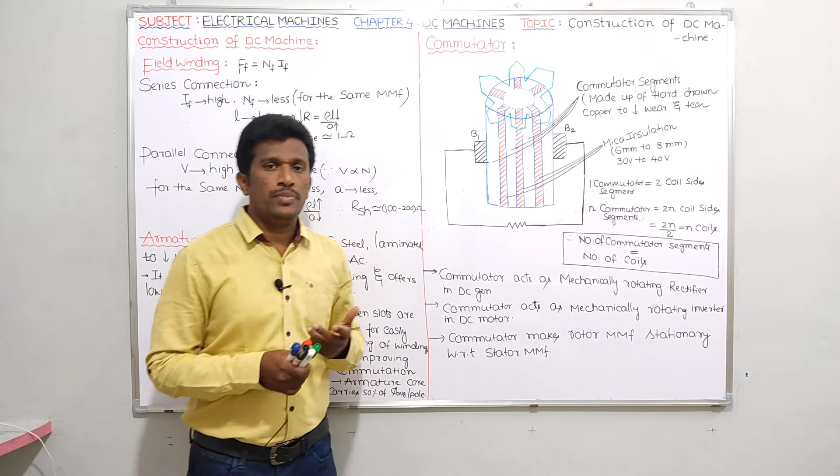Please try to recollect. I told regarding yoke - yoke provides return path for the flux, and yoke carries 50% of average value of flux per pole. Regarding yoke, there is no need to provide lamination because it carries DC flux. And pole core also - there is no need to provide lamination because pole core also carries DC supply.

Whereas pole shoe needs to be laminated to reduce eddy current losses because pole shoe is nearer to armature core. In armature core we already know we have some slots, and in those slots we place armature winding. Armature winding carries AC supply. Since pole shoe is nearer to armature core, there are chances of having eddy current losses, so to reduce eddy current losses we have to provide laminations for pole shoe.

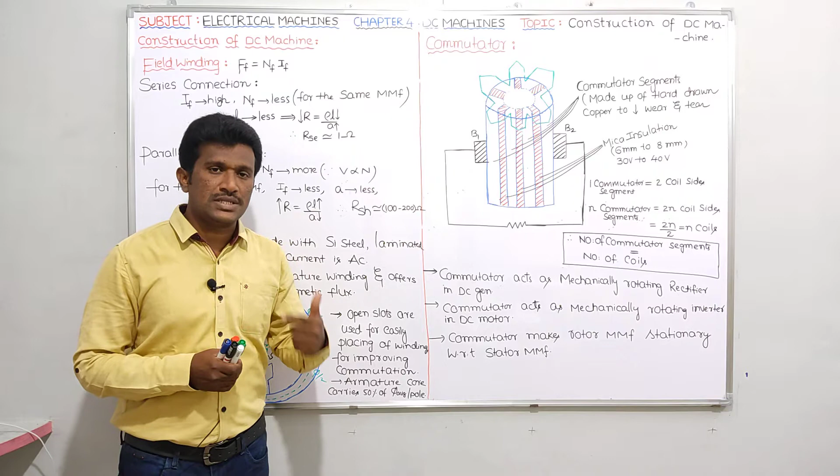And I told about pole shoe also - we always have to use non-chamfered poles, thereby the distribution of flux waveform will get a flat top and trapezoidal shape, so that average value of flux per pole increases, thereby EMF increases and torque increases. I also told pole arc by pole pitch is equal to 0.7 to 0.8, there is a value.

Okay, in this session let me proceed with field winding. If you take this field magnet, to be frank it is nothing but an electromagnet. Since it is an electromagnet, we need winding through which if we send current, then poles will be created. Suppose if I use a permanent magnet, there is no need of using field winding - flux will come automatically. Here since I'm using electromagnets, you have to place field winding on that magnet and give DC supply for the field winding, then only poles will be produced.

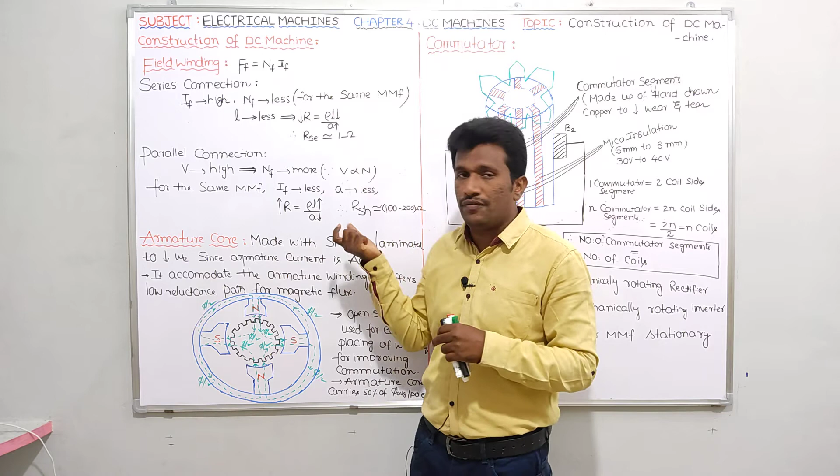So regarding this field winding, generally field winding will be having connection with the armature winding in a DC machine. What is the value of series field winding resistance, what is the value of shunt field winding resistance, what is the relation between series field winding turns and shunt field winding turns - all those things can be explained here.

It's very simple. Generally field winding means what? If you want me to write MMF for the field winding - MMF equals number of turns into current. FF is equals to NF into IF is the formula for field winding MMF.

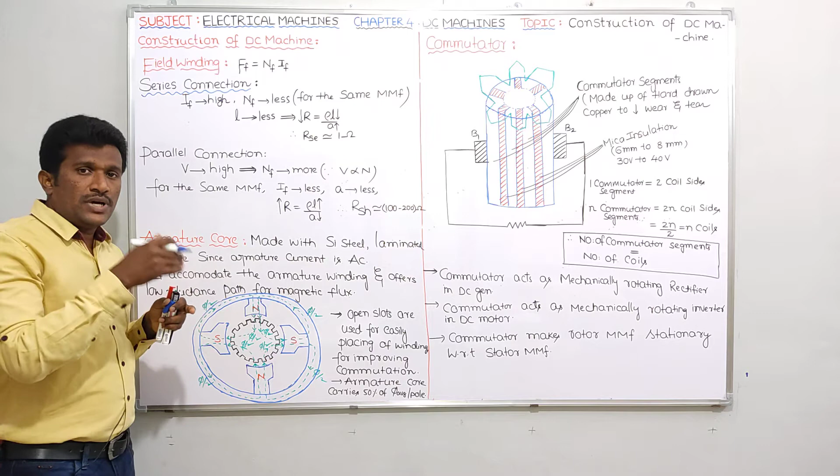Suppose if you take a series machine, you know in series machine you can take series generator or series motor. In series machine field winding will be connected in series with the armature winding. That's why we call field winding as series field winding. Since it is in series with armature winding, the current flowing is more - current is high if field winding is connected in series with the armature winding.

Whenever current is more, cross sectional area for the field winding will also be more. Whenever current increases, definitely cross section area required for the field winding also increases - everybody knows that. And here for the same MMF, if current is more, so what about number of turns? It should be less.

Whenever number of turns are less, length will be less. You know the formula R equals rho L by A. So as I told, whenever field winding is connected in series with the armature, it carries more current, so cross section area for that field winding will be more. And since length is less, resistance value will be less, around 1 ohm.

So what is the conclusion? If I use field winding in a series machine, maybe series generator or series motor, what is the resistance of that field winding? This RSE means the resistance of series field winding, that value will be very less, around 1 ohm. So RSE value is very less and number of turns also very less. That's why whenever I show series field winding, we will be showing less number of turns. This is the reason. Series field winding resistance also will be very less, around 1 ohm.

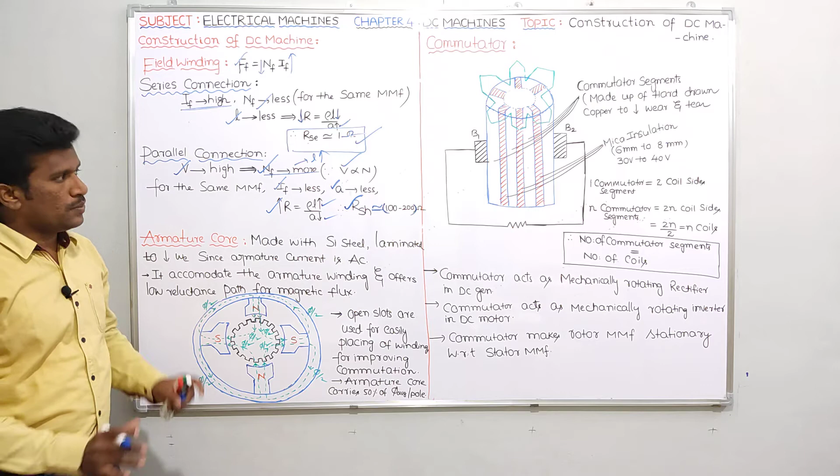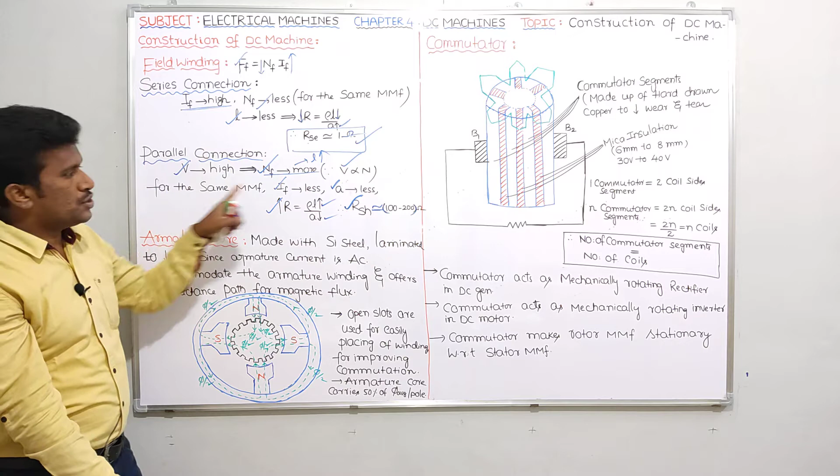Please try to relate these two things, series field winding and shunt field winding. If you observe, shunt field winding resistance value is more than series field winding resistance. Let me write here: RSH value is more than RSE. This is one conclusion. Next, let me compare number of turns. For series field winding, number of turns are less. For shunt field winding, number of turns are more. So number of turns for shunt field winding is more than number of turns for series field winding.

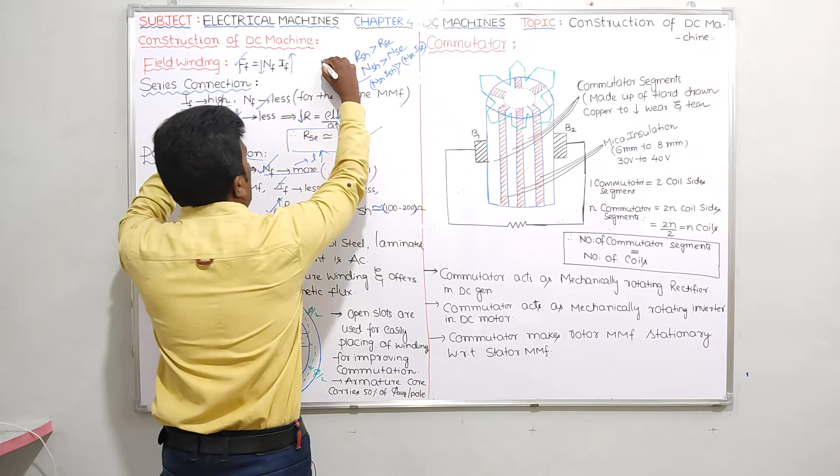Let me compare NSH, ISH and NSE, ISE. That means if you want to compare MMFs of shunt field winding and series field winding, shunt field winding MMF will be more than series field winding MMF. Before that, let me compare shunt current and series current. Shunt current is less, series field winding current is more. That means ISH is less than ISE.

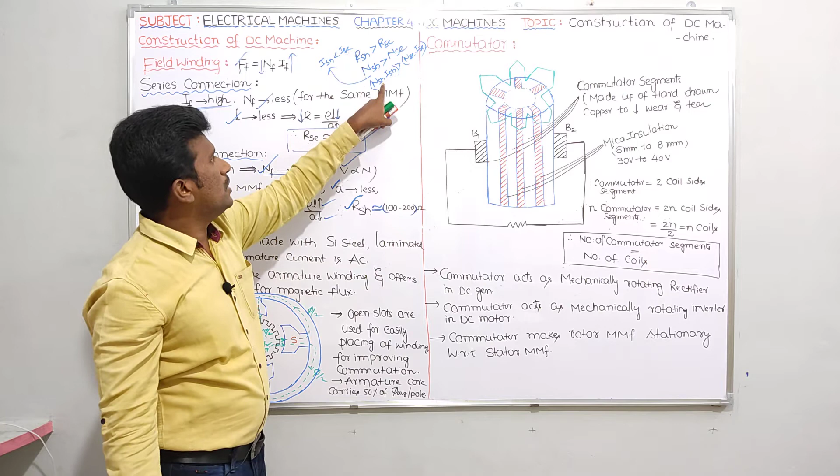You may get a doubt here: since ISH is less than ISE, you may think NSH times ISH should be less than NSC times ISC. Not correct. Because MMF depends on current and number of turns, but mainly it depends on number of turns. Since NSH is more than NSC, though ISH is less than ISE, since NSH is more than NSC, therefore NSH ISH is more than NSC ISC.

So please try to remember these relations. If you compare shunt field winding and series field winding: shunt field winding resistance is more than series field winding resistance, shunt field number of turns are more than series field number of turns, shunt field current is less than series field current, and shunt field winding MMF is more than series field winding MMF. Please try to remember these things, it will be useful for us in future.

Okay, next, this is about field winding. Now let me discuss about armature core, guys. Armature core, it's very simple.

Just like the pole core provides accommodation for field winding, the armature core provides accommodation for armature winding. In the armature core you have to provide slots to place the armature winding. This means the armature core accommodates the armature winding, and it offers low reluctance for the magnetic flux. That is very important.

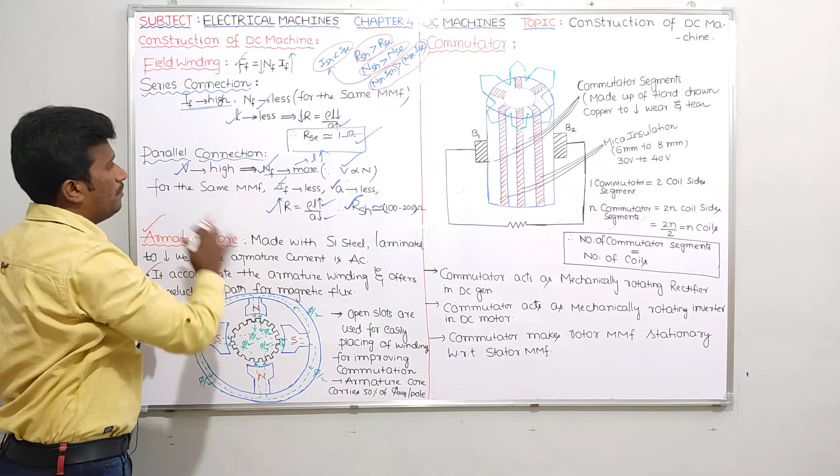See guys, this diagram I already drew in the previous video, so I just drew a very big diagram here. I think I erased it, but it will be there in your notes. There's no need to draw it once again, but if you want, you can draw it.

See guys, whatever flux is coming from under one pole, here I already took it as, suppose, flux per pole - the average value of flux per pole - I had taken as phi. Suppose under the north pole it is phi.

This phi is dividing like this: flux lines always start from the north pole surface and reach the south pole surface, taking a path like this, dividing as phi by 2. Once again from this north pole it comes and reaches the south pole surface, taking another path, once again phi by 2. From this north pole also it goes like this and like this, dividing as phi by 2 and phi by 2.

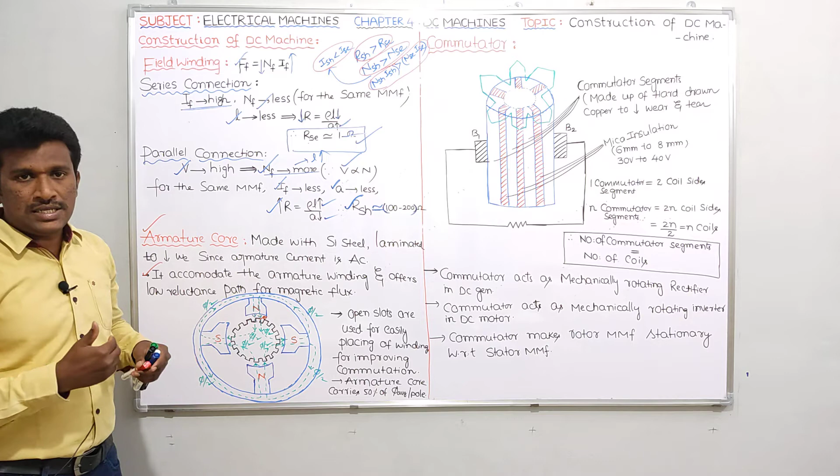So whatever the average value of flux per pole is, for that flux the armature core provides low reluctance. Thereby, distribution of flux will be more. So the armature core provides a low reluctance path for the magnetic flux - you have to remember that.

And one more thing guys, regarding slots - we already discussed this in induction machine. There I told the difference between open slots, semi-open slots and closed slots. Please refer to the induction machine chapter, there I gave some specifications for open slots, semi-open slots and closed slots.

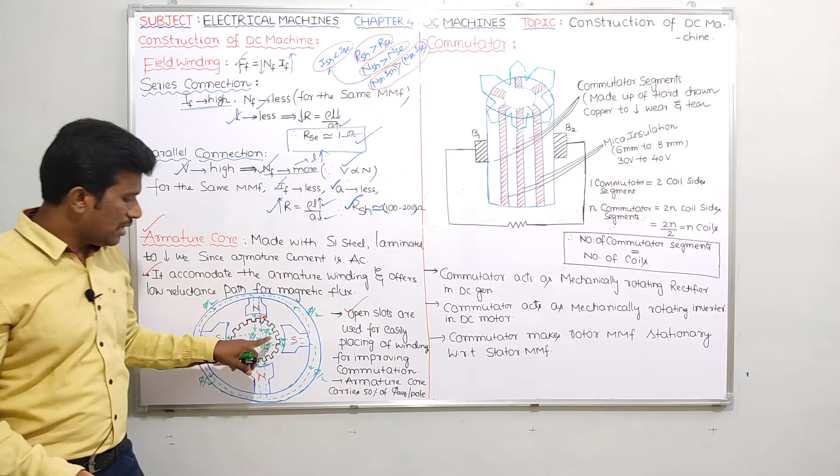In DC machine, open slots are used. Why? For easily placing the winding. In the armature core you have to provide slots, and in those slots only you are placing the armature winding, so for easy placement of winding, open slots are used here. One more reason: open slots are used in DC machine for improving commutation. Open slots are used for easy placement of winding, and for improving commutation.

About this commutation, all those things will come in the future, we'll see afterwards. Next, in the previous video, if you observe clearly, I told one point.

Suppose average value of flux per pole is phi, I told that each portion of the yoke carries 50% of the average value of flux per pole. See, under this north pole, I am having two flux lines, and those two flux lines only I am assuming as phi. Because of that, in the yoke only one single line is there in this portion. So that becomes phi by 2. That's the reason I told the yoke carries only 50% of the average value of flux per pole.

Now see guys, like that, if you see the armature core also, here I am having only one line, here also one line, here also one line, here also one line. But under the north pole, here I have two lines. Whatever two lines are under the poles, north pole or south pole, that indicates phi, the average value of flux per pole.

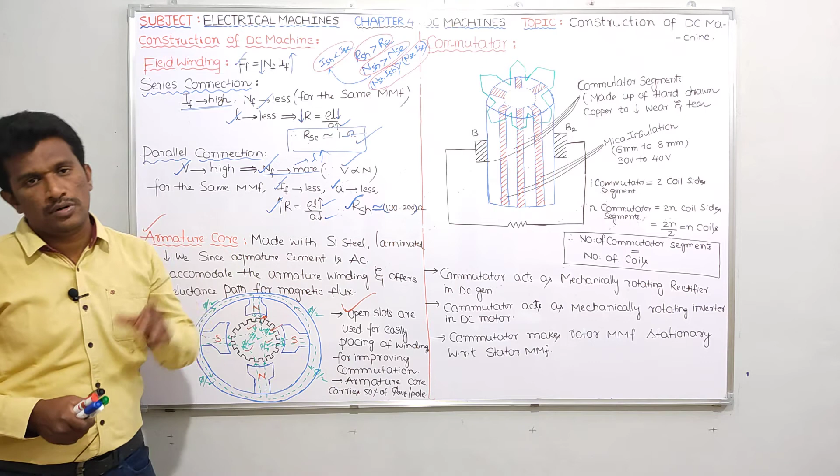Okay, this is about the armature core. Next guys, regarding the commutator.

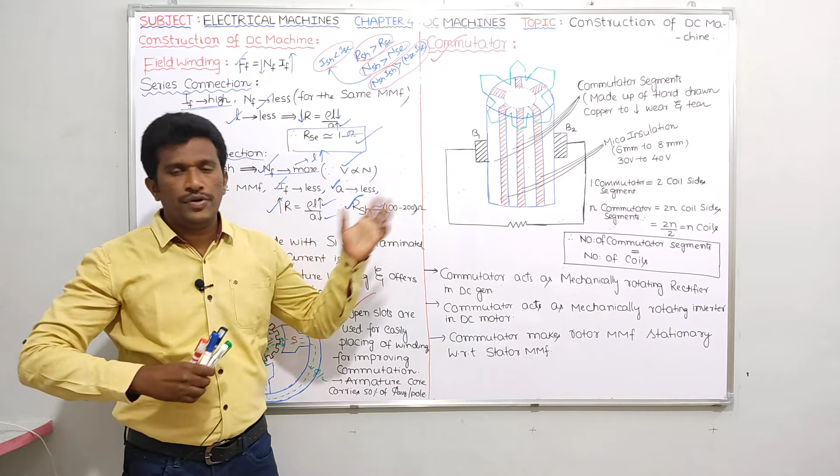Regarding commutator, in the first two videos, with simple loop diagrams of a DC generator and DC motor, we explained the function of commutator. Commutator is nothing but a group of commutator segments.

In a DC generator, commutator acts as a mechanical rotating rectifier. This is already clearly given in lecture 1. Commutator converts the AC induced in the armature winding to DC, and that DC is given to the load.

In the second lecture, simple loop diagram of DC motor, I explained: if you give DC supply to the DC motor, commutator converts the DC supply to AC, and that AC is given to the armature winding. Therefore commutator acts as a mechanically rotating inverter. Please remember this.

In addition to these two functions, commutator has one more function. If you see in a DC machine, or any rotating machine, to produce torque we need two fluxes.

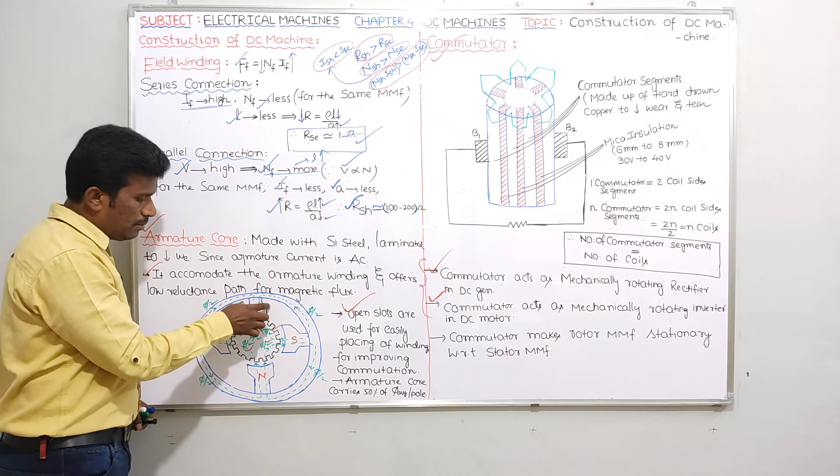Speed of stator MMF and rotor MMF should be the same, otherwise no torque will produce. So commutator makes rotor MMF stationary with respect to stator MMF. In a DC machine, stator MMF speed is generally 0, and commutator makes rotor MMF speed also 0, so torque will produce.

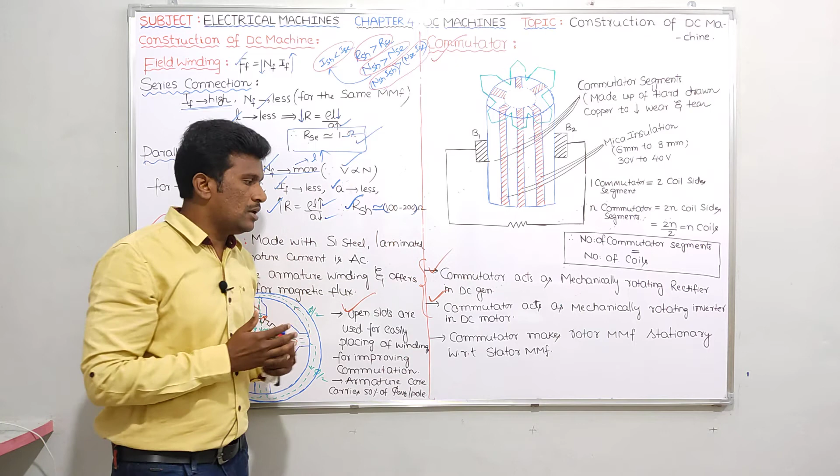Suppose stator MMF rotates at 500 rpm, rotor MMF also rotates at 500 rpm. If stator MMF rotates at 1000 rpm, rotor MMF also rotates at 1000 rpm. This function is carried out by the commutator — it makes rotor MMF stationary with respect to stator MMF, whatever the stator speed is.

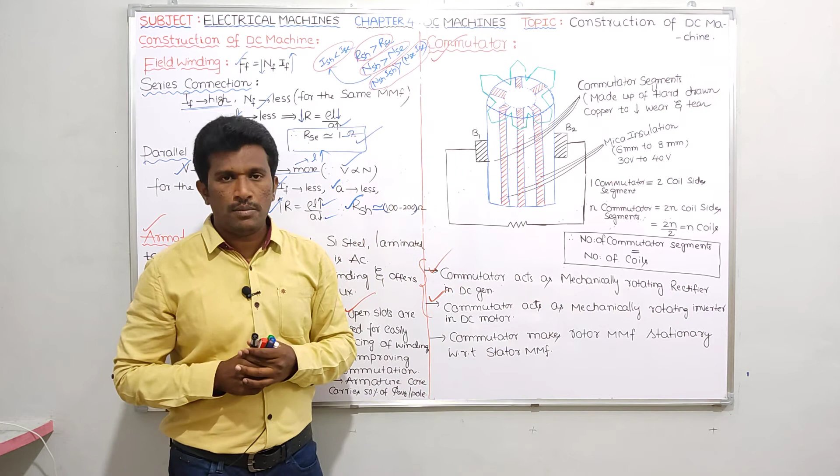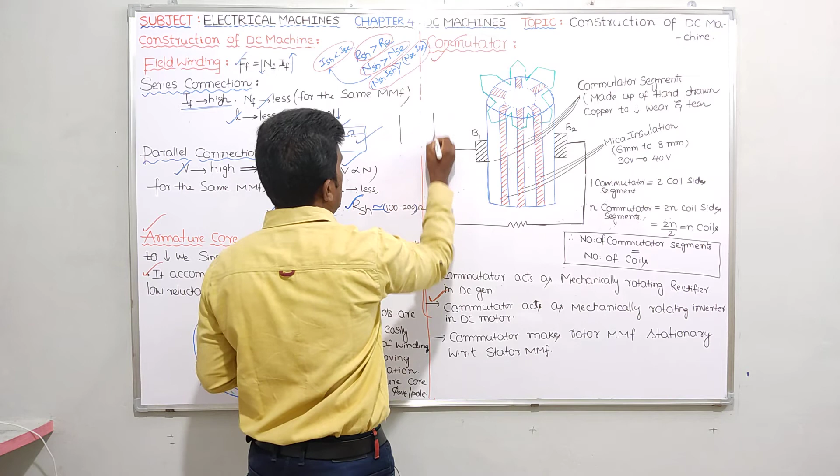In addition to these points, you should remember some more. Let me take this as a commutator with commutator segments. In a simple loop diagram, if I take a coil like this — this is nothing but a conductor. AB is a conductor I had taken, and CD is a conductor.

If you observe the first and second lecture, I drew it like this — please try to recollect. Here we have X and Y segments. This is the commutator: the X segment and Y segment separated by mica insulation. I had taken only two segments here, since a group of commutator segments can be called commutator. This is the front view of the commutator segment.

Suppose if you draw the commutator segments like this, this is only the front view. If you draw commutator segments clearly, this is segment number X and Y I had taken. Like this, so many segments will be there.

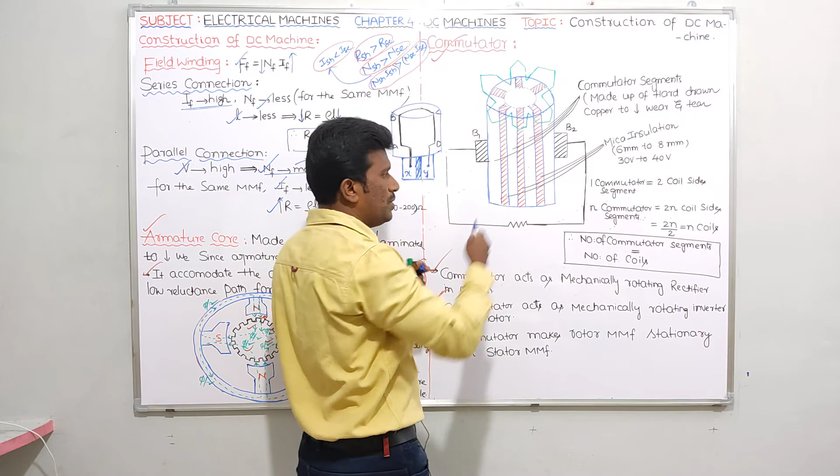Segment number 1, 2, 3, 4 and so on. Group of commutator segments can be called as commutator. These segments are separated by mica insulation. This is commutator segments.

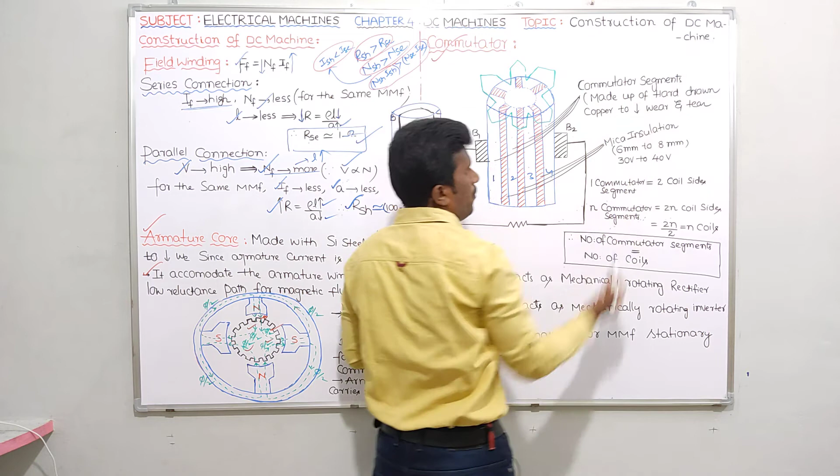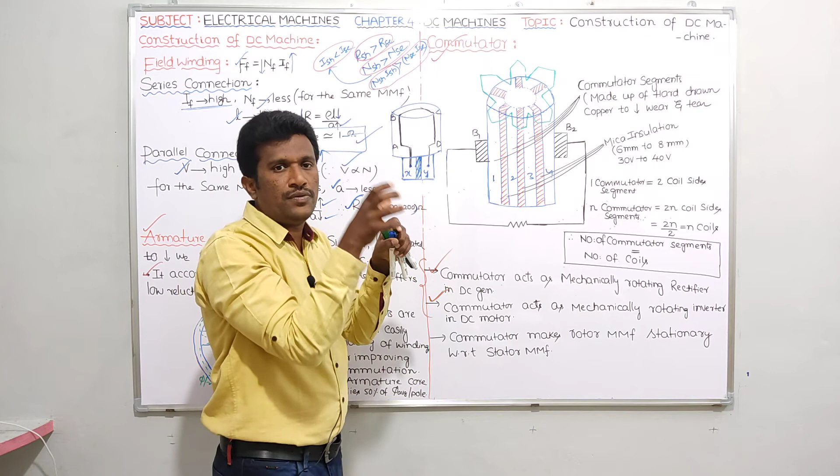Commutator segments are made up of hard drawn copper. This is to reduce wear and tear. In a DC machine, brushes are stationary, they won't rotate, but your split rings, or commutator, will be rotating. Therefore, there will be some friction between commutator segments and the brushes. To reduce that wear and tear, segments should be made up of hard drawn copper, so that wear and tear can be reduced.

This is about mica insulation. It is 6 mm to 8 mm, and it can withstand 30 volts to 40 volts. Let me explain this relation, guys.

If you see here, in segment 1 I will be placing one conductor, and in another segment I will be placing one more conductor like this. I had taken only two conductors here, only one coil. Like this, so many coils will be there. For example, this is one coil, this is another coil, and another coil like this. So many coils will be there.

In this segment, how many coils are there? How many coil sides are there? First of all, you should know the difference between coil sides and coil. See, it is a coil. But this is nothing but coil side. This is about coil side. Two coil sides gives you one coil here.

Two coil sides gives you one coil. It is a coil side. Please try to refer to synchronous machine terms belonging to armature winding. There I clearly explained about a coil side, a turn, single turn coil, 2 turn coil, n turn coil. Please refer to the synchronous machine topic, terms belonging to armature winding.

Here, this is nothing but one side. Suppose in this segment, you see this one side, another side — two coil sides are there. If you observe this one also, one side, another side. So in one segment, two coil sides are there.

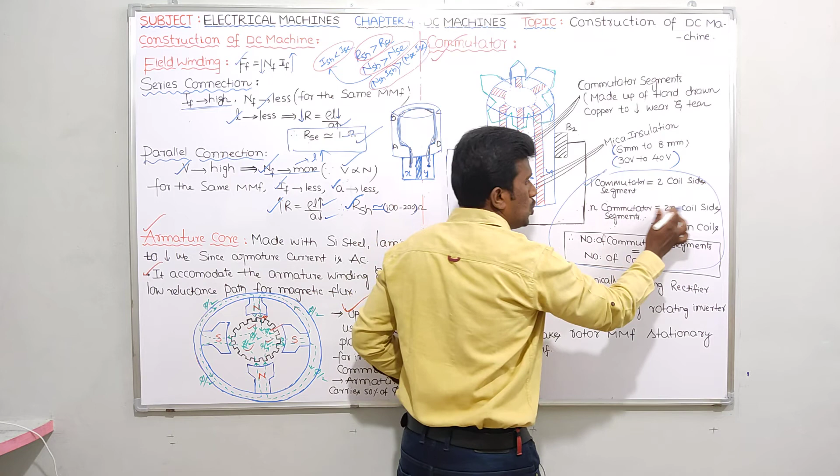Suppose if n commutator segments, 1 becomes 2, that means double. N commutator segments becomes 2n coil sides. So number of coils is equals to number of coil sides by 2.

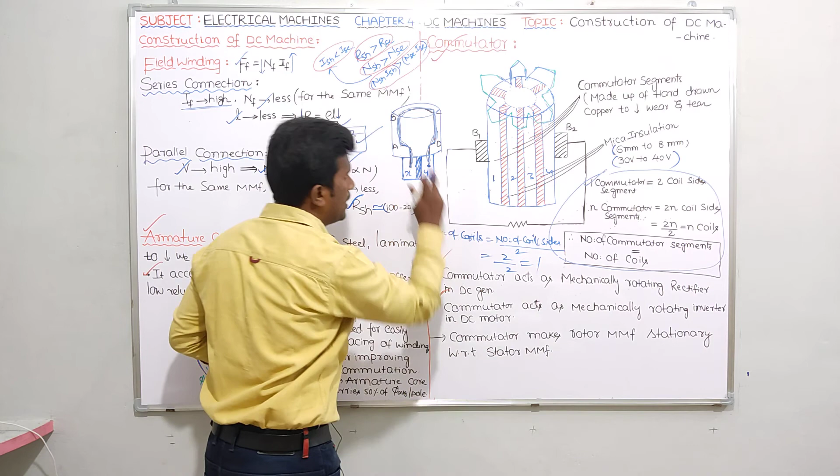If you want, you can check here. Two coil sides are there, one coil is there. Number of coils is 2 by 2 equal to 1. How many coils are there? One coil is there. Therefore, in one segment you are having 2 coil sides. For n commutator segments, you will be having 2n coil sides. 2n coil sides, by 2, becomes coils.

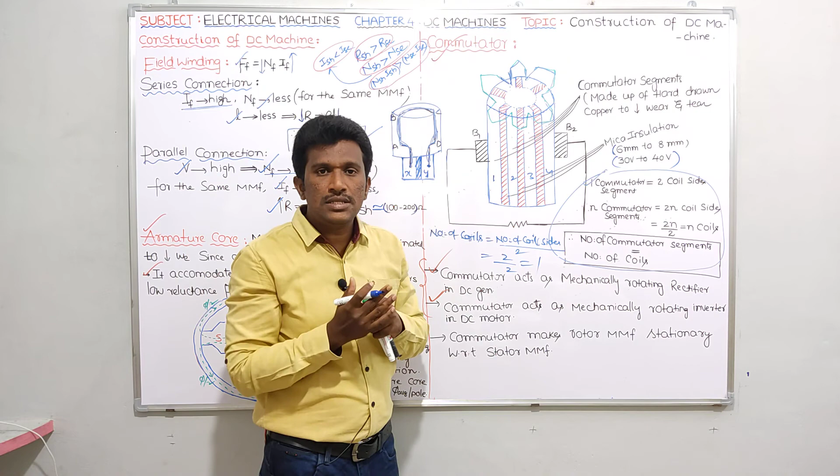I told n commutator segments equals to 2n coil sides. 2n coil sides means how many number of coils? So 2n by 2, n coils. There is no need to confuse. One coil means 2 coil sides. N coil means 2n coil sides. Therefore, n commutator segments equals to 2n coil sides is equal to 2n by 2, n coils.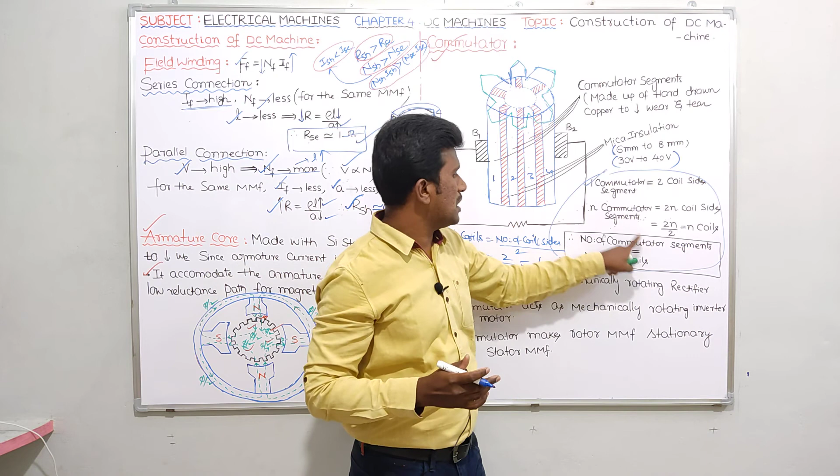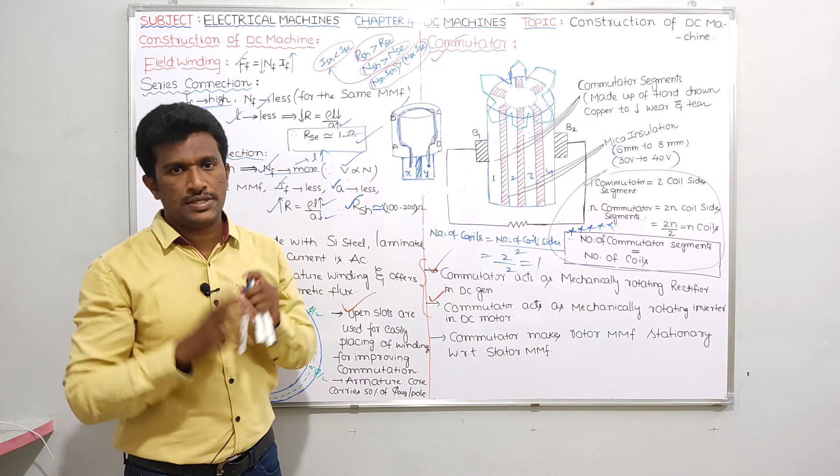So, number of commutator segments is equal to number of coils. This is a very important relation you should remember, guys. Number of commutator segments is equal to number of coils. Don't confuse coil sides with coils. Number of coils is equal to number of coil sides by 2. Always the number of coil sides will be more.

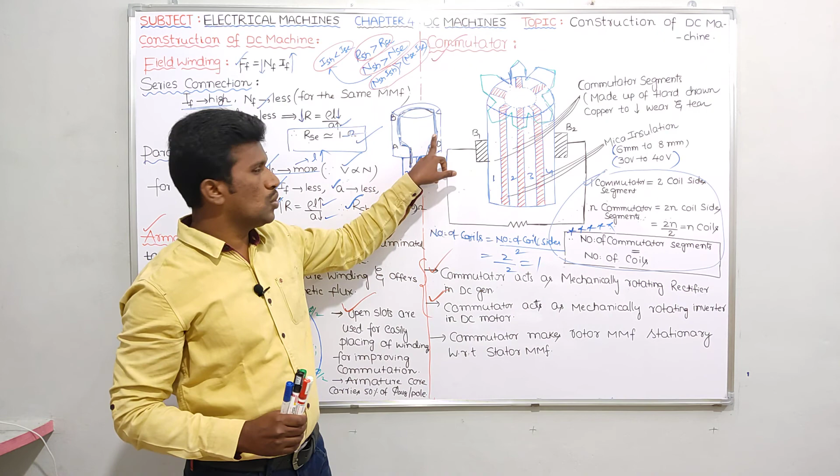For example, in this case, 2 coil sides, 1 coil. That means number of coils is equal to number of coil sides by 2. In this example, I am having 2 coil sides, 2 by 2, 1 coil. Like that, if you are having 2n coil sides, divide by 2, that becomes the number of coils. So n commutator segments gives n coils. Number of commutator segments equals number of coils is the relation. Please try to remember this relation, it is also important.